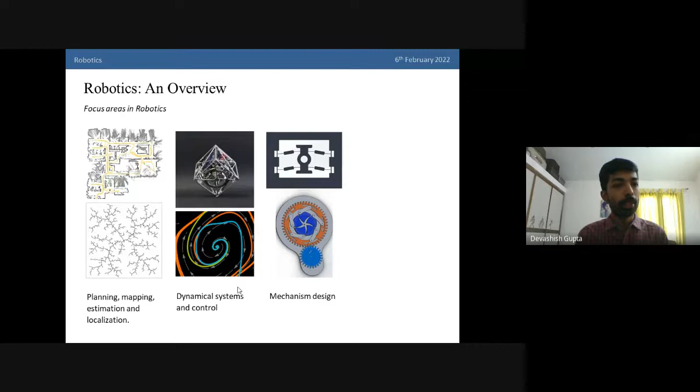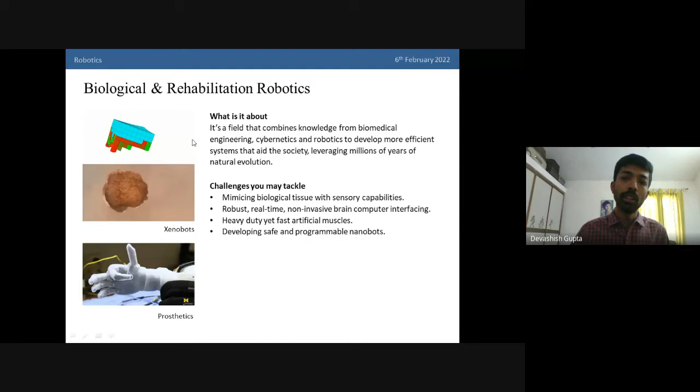There are some challenges within this field that one must tackle. If you wish to get into biological and rehabilitation robotics, you may try to mimic biological tissue that has sensory capabilities. Take our skin as an example. It is one of the most sensitive organs on our body. It can sense pressure, contact, temperature, and the roughness of a surface, characterizing surfaces based on particular texture. Mimicking this capability within a synthetic material with sensors is quite challenging.

Then we have a challenge within the area of brain-computer interfacing. Developing a robust, real-time, and non-invasive brain-computer interfacing system has been a challenge for quite some time. Non-invasive means one need not install a chip inside one's brain for the brain-computer interface to be active.

So thirdly, we have development of artificial muscles. Within this area, there has been a bit of success with materials like shape memory alloys, which have quite a bit of load carrying capacity. But their speed of operation is quite slow, because it depends on the ambient temperature and the corresponding change in crystal structure. So developing fast artificial muscles that also have huge load carrying capacity has been a challenge for quite some time.

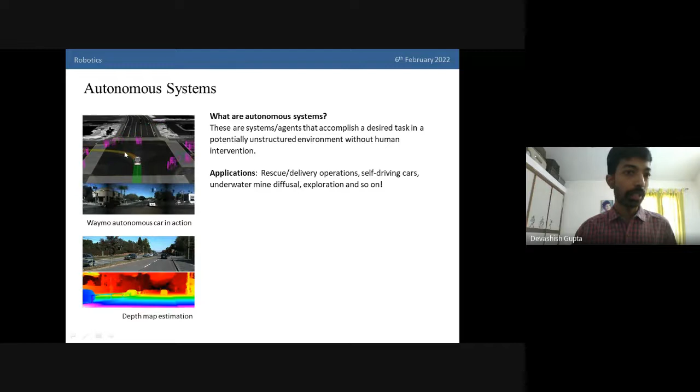Where would you actually use these systems? That's a question to ask. We can use these for rescue or delivery operations, and self-driving cars, of course. On the left, you can see the autonomous car built by Waymo, a company in the US. You can see it in action here—it's detecting all the cars around it based on the camera feed, and it's path planning as well.

Then we have underwater mine diffusal and exploration. You can use autonomous systems for that purpose as well.

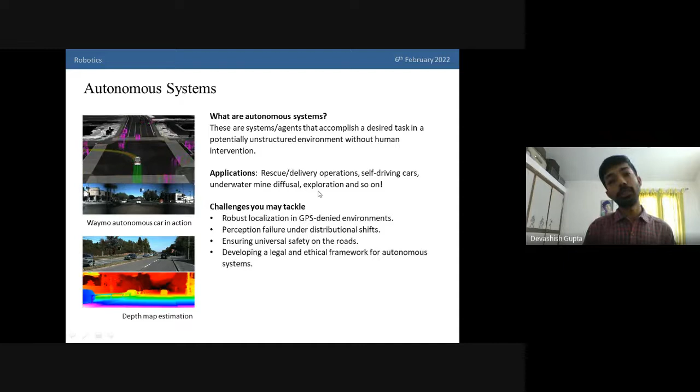Now, there are a few significant challenges within this field that you may tackle. First is robust localization under GPS-denied environments. Let's say you were traveling through a tunnel inside an autonomous car, which is relying on GPS for localization and no other system. Naturally, inside a tunnel there won't be any GPS signals, so you would lose your ability to localize and ultimately control your vehicle, and this would lead to accidents. So this is a problem that we have to tackle.

Secondly, we have perception failure under distributional shifts. This means let's say we have a vision stack developed in the US, and the training data was obtained on the roads of California. If we deploy that same vision stack on the roads of India, do you think it would work? Naturally it won't, because the data used for training is different from what the stack would observe on Indian roads—there would be different kinds of trees, different kinds of animals on the road, and pedestrian behavior would differ as well. So that's a challenge.

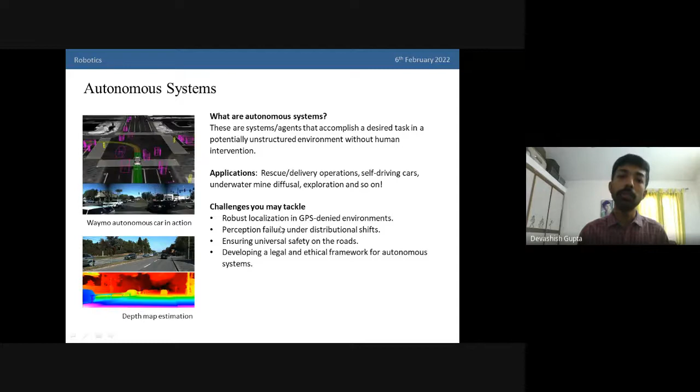Then there's ensuring universal safety on roads. Basically, your autonomous system should not discriminate between any particular obstacle. Let's say we have cars and trucks—your vision stack is perfect at detecting those, but it misses cyclists from time to time. This would lead to hazard for life on the road. So that's a challenge. And finally, we also have to develop a legal and ethical framework for autonomous systems in the decades to come, because if you get into an accident while sitting inside an autonomous car, who is to blame? That's the problem here.

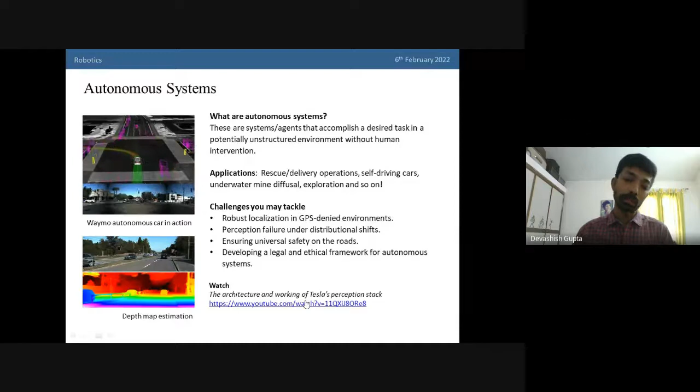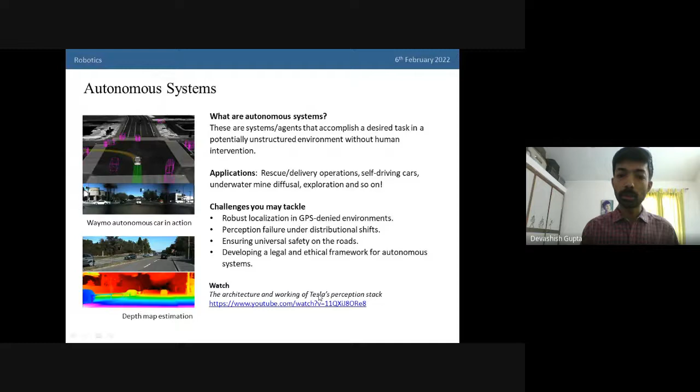I'd recommend you watch this video, a talk delivered on Tesla AI Day, which explains the architecture and working of Tesla's perception stack currently being used within Tesla models. That's an interesting talk—I recommend you check it out.

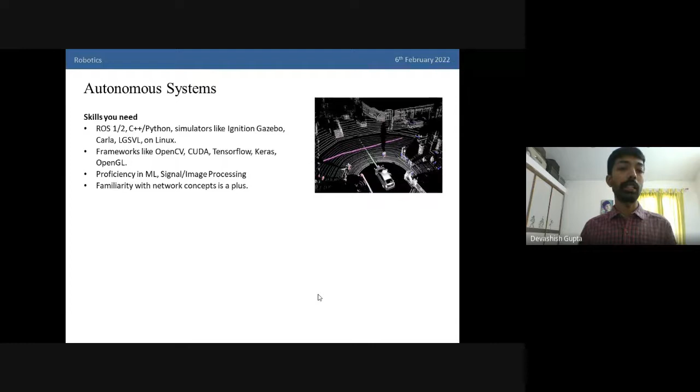The skills you need to work on autonomous systems: ROS 1 or 2 experience, C++ or Python, and experience with simulators like Ignition Gazebo, Carla, LGSVL, and of course Linux. Then frameworks like OpenCV for vision, CUDA for hardware acceleration, TensorFlow, Keras, OpenGL helps a bit as well, and proficiency in machine learning, signal or image processing. Familiarity with networking concepts is also a plus.

Then we have avenues for jobs—these are quite well-known companies: Waymo, Tesla, Nvidia, Google, Uber, and in India, Ola, as well as Apple and Huawei.

For higher studies or research, you could go to Stanford ASL, the Autonomous Systems Lab there, Ford Center for Autonomous Vehicles at University of Michigan, ETH Zurich, UCSD, U Toronto, or UC Berkeley. In the UK, you could go to Cranfield University, where you could do an MSc in Autonomous Vehicle Dynamics and Control, or NavLab at CMU as well.

So coming to multi-agent coordination and control.

This involves robotics swarms and handling of those. So why should we care about swarm robotics in the first place? It's because they have an ability to solve very complex tasks with collective behavior generated by very simple rules and interactions, and they are capable of adapting to their environment. Just imagine colonies of ants, the hierarchy within those, and how communication takes place between two different ants through pheromones. It's quite fascinating.

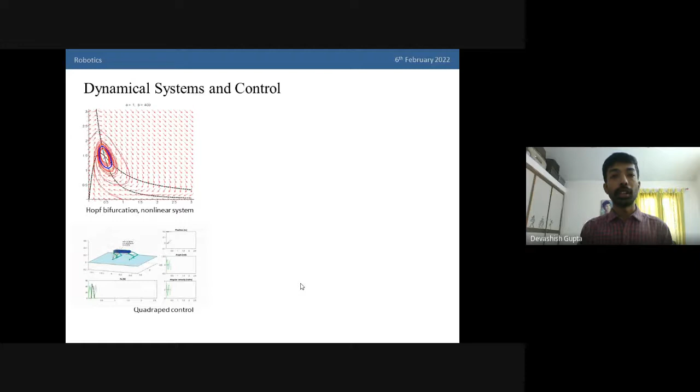And now we come to dynamical systems and control. So what's the purpose of control? Why do we need a control system for our robot? For any robot to execute our commands, the user commands, and execute a desired motion or something, it should be able to do it perfectly. So we need a control system that regulates the system behavior and minimizes error with respect to the user commands.

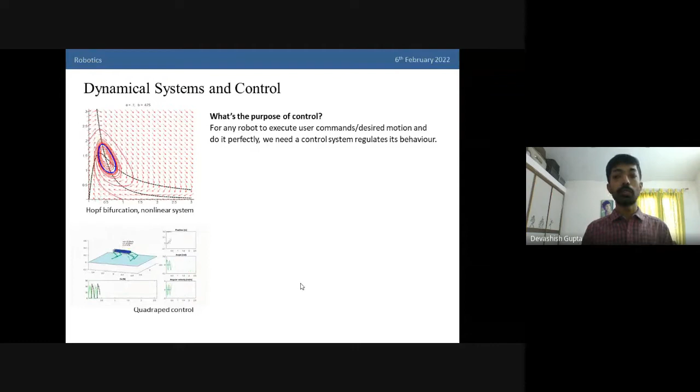And there are a lot of applications for control systems. It's present in almost all of the industries. We have process control, which is useful in chemical manufacturing plants. There's locomotion in bipeds and quadrupeds, attitude control in space, how the reaction wheels should operate in order to maintain the orientation of the satellite or the spacecraft.

Challenges within this field include: we have a lot of traditional controllers like PID that can be used for a lot of systems, but there are certain systems with non-linearities with which PID cannot be used. It simply cannot model the behavior of a nonlinear system with a theory that was built for linear time invariant systems.

Now, efficient real-time implementation of advanced control techniques is also a challenge. These techniques can include receding horizon control, which I'll explain. An example for a receding horizon controller is nonlinear model predictive control. So there are three words here: model, predictive, control. We have a model of the robot or any system, and using that model, we can make certain predictions based on the control input that we can give to the model.

So in MPC, what we do is based on the model, we have the ability to predict what the system would do, and we optimize over the space of all the possible control inputs to the system in order to find the optimal control input, which minimizes the deviation between the desired path that the model should take and the predicted path. So you have to do this optimization at every time step.

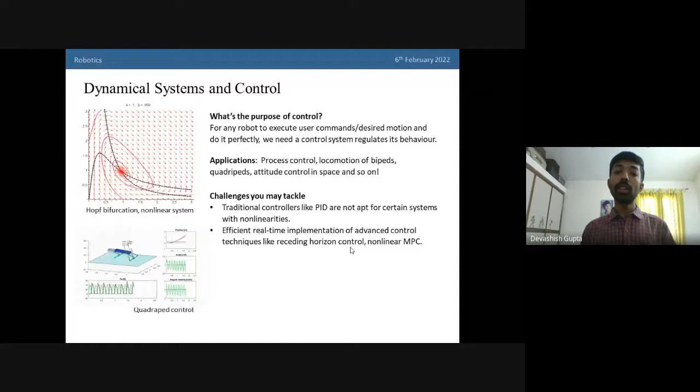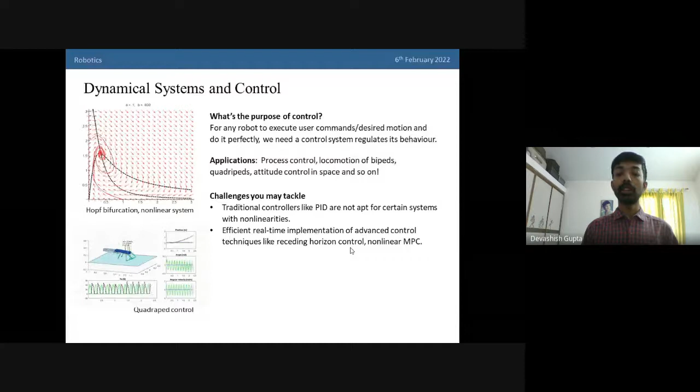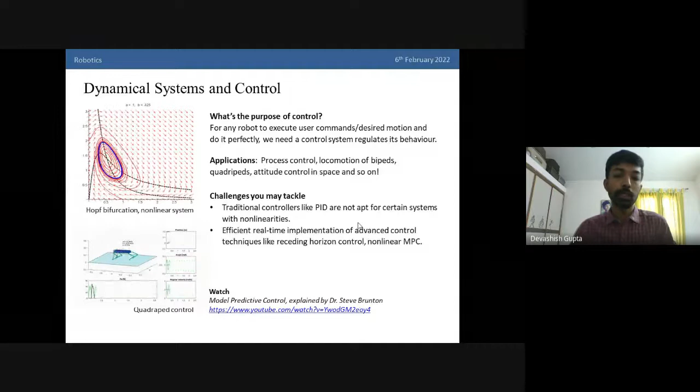And for stacks which are working at 30 hertz or something, this nonlinear optimization has to happen 30 times a second. That's quite a challenge for real-time implementation. So if you wish to take a deeper look into model predictive control, I recommend you watch this video by Steve Brunton, he explains it quite well.

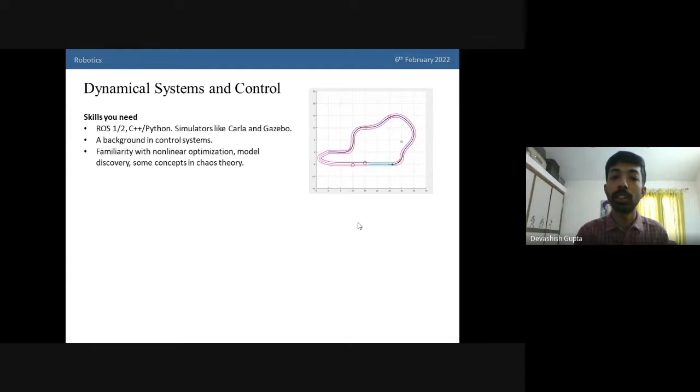Okay, so skills you need for getting into this area: ROS experience, C++, Python, and simulators like Carla and Gazebo. You also need to have a background in control systems, obviously, and also familiarity with nonlinear optimization, model discovery, and some concepts in chaos theory help as well.

So for jobs, you may go to these companies: Fanuc, Honeywell, General Dynamics, Emerson, Rockwell Automation, which is for industrial automation. Then for higher studies, you could go to Boston University, WPI, Binghamton University, Santa Clara as well, and there's an Applied Dynamics and Optimization lab at New York University, NYU.

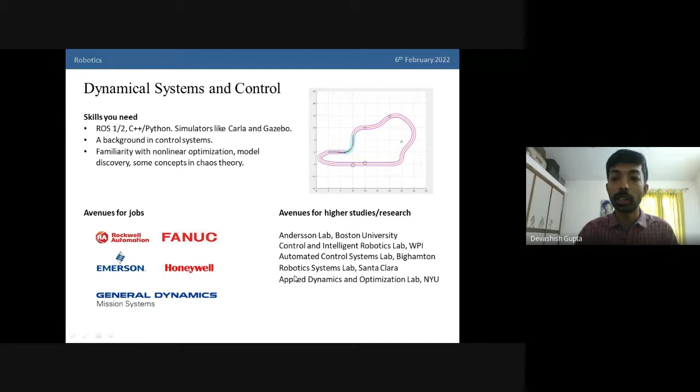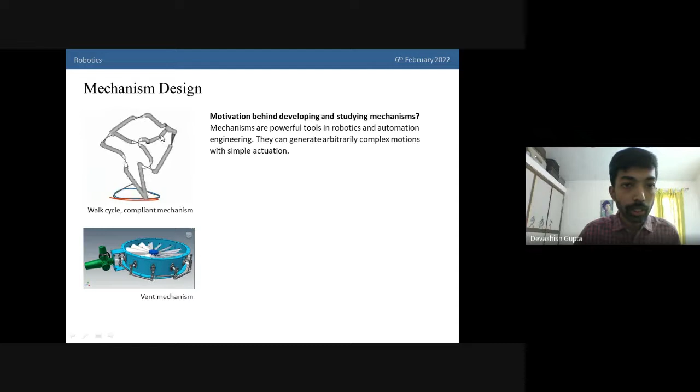So finally, we have mechanism design. Why should we care about developing and studying mechanisms? This is because mechanisms are very powerful tools in robotics and even automation engineering, and they can generate arbitrarily complex motions with very simple actuation. As you can see on the left, there's a simple rotational actuation here, and with that actuation, the compliant mechanism is generating a complex motion like this walk cycle.

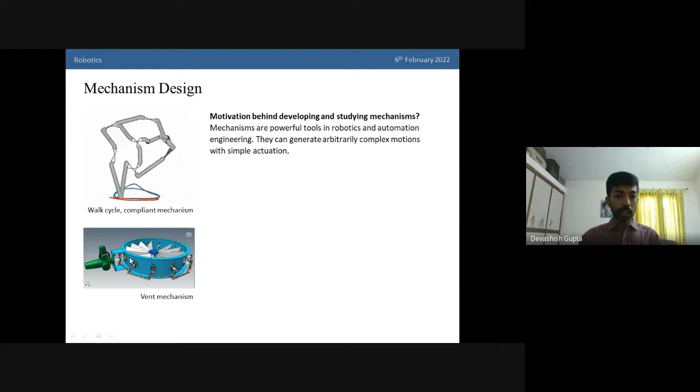And here also there's a vent mechanism. There's a simple rotational actuation here, and that operates all of the fins here. So that's why mechanisms are very useful.

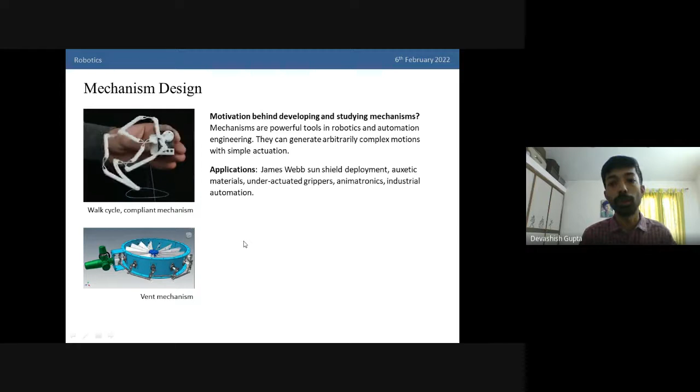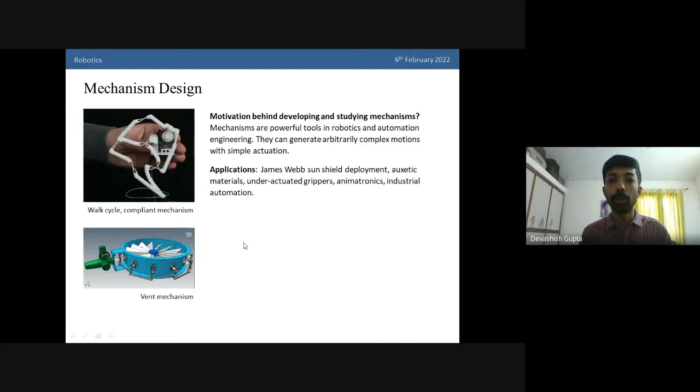Applications include the James Webb Space Telescope. I think it has already been deployed and is going towards the Lagrange point it has been designated to. The sun shield that was developed for the James Webb Space Telescope uses a mechanism to deploy.

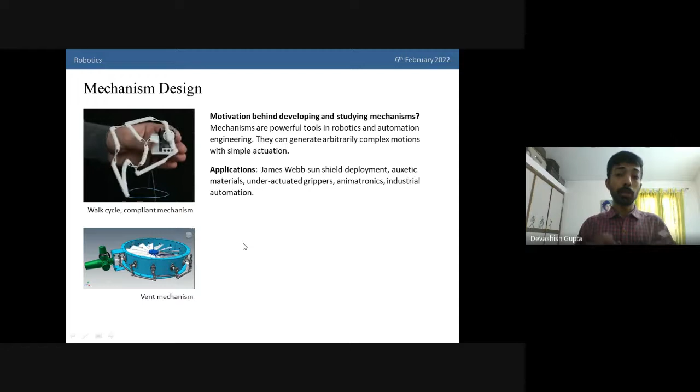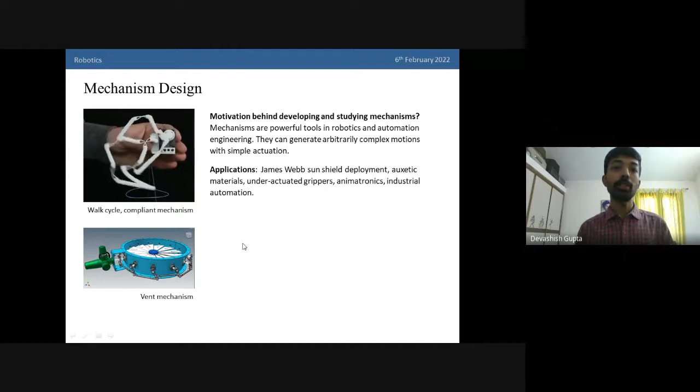Then there's auxetic materials as well, which are mechanical metamaterials that have negative Poisson's ratio. These are fascinating materials. And then you have underactuated grippers, animatronics, which is used in the special effects industry, and industrial automation as well.

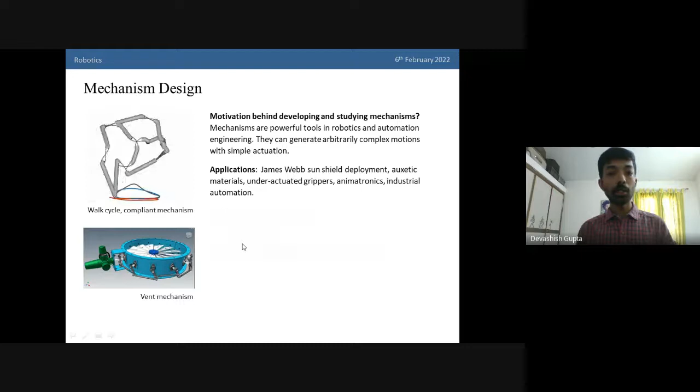So here are a few problems that you can work on if you wish to get into mechanism design. You can develop micro mechanisms for mechanical metamaterials, like I mentioned, auxetic materials.

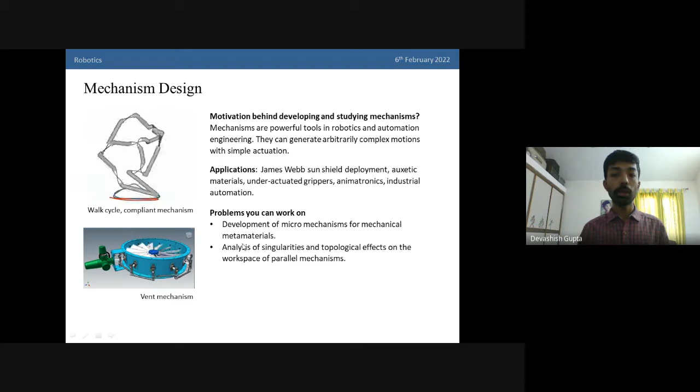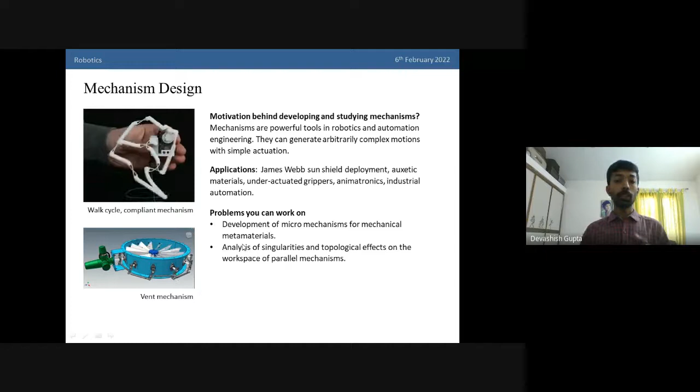The field of parallel robots and parallel mechanisms is not as much explored as serial robots. The analysis of singularities and their topological effects on the workspace of the parallel mechanism or robot has not been studied very extensively, so you can work on that area.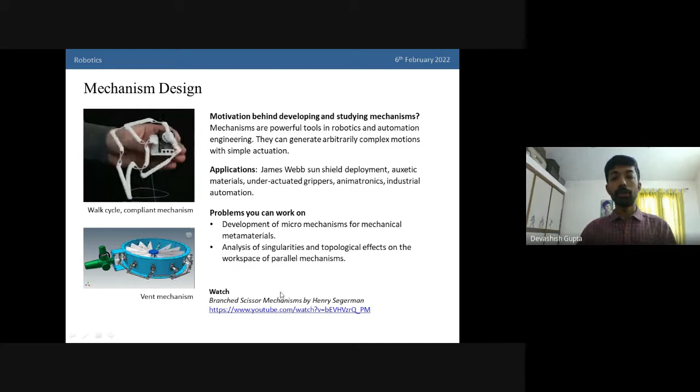And I would recommend you watch this video on branched scissor mechanisms by Henry Segerman. It's quite an interesting mechanism.

So the skills you need for mechanism design: this field involves multi-body dynamic simulations, so you need familiarity with that. Softwares like MSC Adams or COMSOL Multiphysics would play a role here. Similarly, you need familiarity with finite element methods as well, and formats like URDF and COLLADA, which can be used to model any kind of serial robot or linkage and so on, any mechanism. And intuition in origami would be a plus.

Then for jobs, you could work at Boston Dynamics, Wolfram Research, Raytheon Technologies, Penta Robotics. And for higher studies, you could go to the Geometric Computing Lab at EPFL.

This is, I think, one of the most fascinating and fun labs in this area, and it has a YouTube channel as well. I would recommend you check it out, it's quite interesting. Then you could go to CMU, ASU which is Arizona State University, Brown University, McGill, and you could go to USC as well, University of Southern California.

We have now looked at robotics, so let's take a look into artificial intelligence. What fields exist within artificial intelligence, what areas are there?

We have machine learning first, which is quite a vast field, and we'll discuss it in detail. Then we have natural language processing, which involves dealing with natural language, of course human interpretable language. Then we have evolutionary computation, where algorithms and optimization techniques based on biology are used, like genetic algorithms. And then we have computer vision, which we have already discussed, and finally we have knowledge discovery and data mining.

So finally, let's look into the field of space technology and what all fields exist within it. We have propulsion systems, then flight computing, avionics, navigation, and control, which is basically all of the electronics responsible for the entirety of spacecraft operation. Then we have human health, life support, and habitation systems, which are quite important if astronauts are involved within the mission. Then we have sensors and instruments which enable us to carry out scientific experiments out there in space.

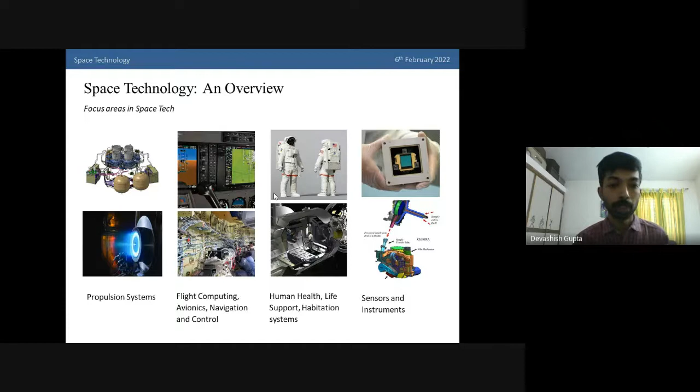So coming to propulsion systems, what is this area about? As the name suggests, this area covers the technologies for both chemical and non-chemical propulsion systems and the related ancillary systems, for space launch and even in-space propulsion applications.

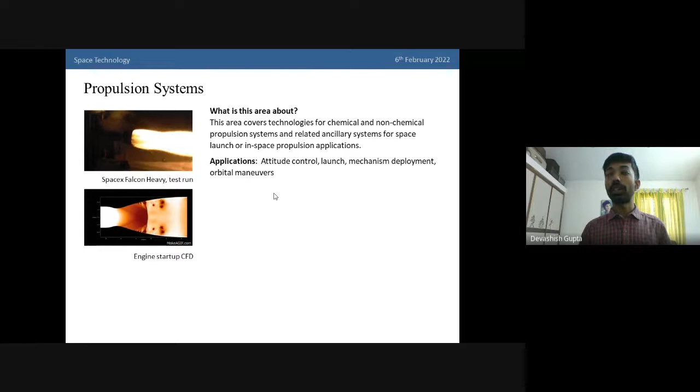So what are in-space propulsion applications? Like attitude control, we have reaction thrusters which try to maintain the orientation of the satellite or spacecraft in space, so you need a propulsion system for that. Then we have launch, of course propulsion systems are needed. Mechanism deployment, like for the James Webb Space Telescope, and also for performing orbital maneuvers, we need thrusters.

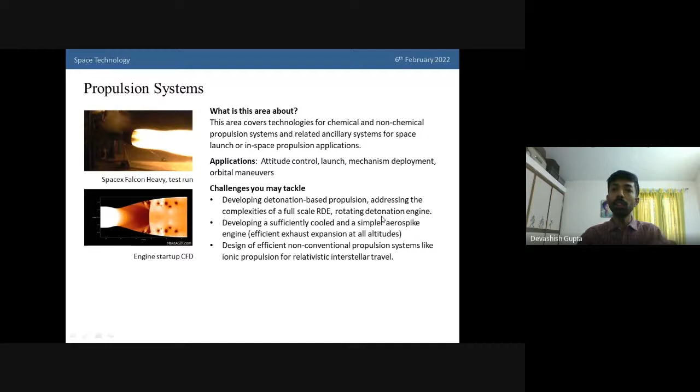Then there are a lot of challenges within this field. Firstly, a lot of propulsion systems that exist right now operate on the deflagration based mechanism. Deflagration is basically a rapid combustion process, but developing detonation based propulsion, which involves shock waves and harnessing the energy from shock waves, has been quite challenging. There's an engine called the RDE, rotating detonation engine, which has an annular combustion chamber in which shock waves are perpetually sustained using periodic fuel injection and so on. That engine has not been deployed at full scale yet.

What's the benefit of detonation based propulsion? Its efficiency is considerably higher with respect to deflagration based propulsion. So that's the challenge here.

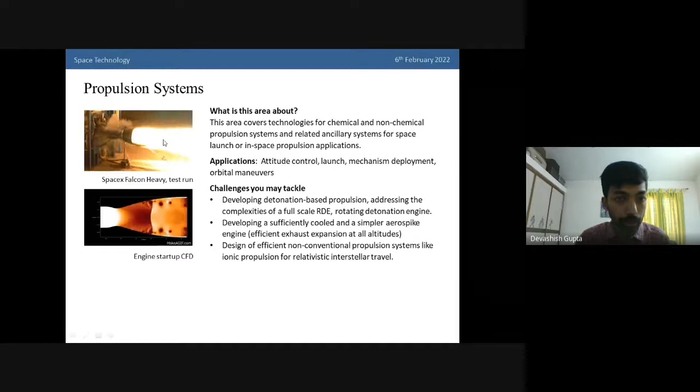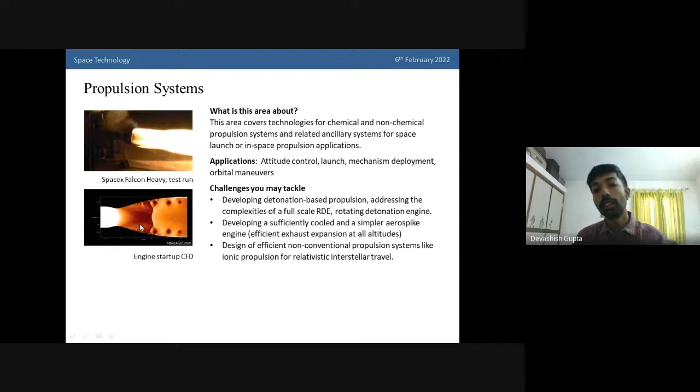Then developing a sufficiently cooled and simpler to manufacture aerospike engine. Basically, an aerospike engine has efficient exhaust expansion at all altitudes. The GIFs linked here use a standard converging diverging nozzle, and that's how they expand and accelerate the gas coming out of the nozzle. So the nozzle geometry is fixed, and there has to be an optimal expansion ratio for the gas at a corresponding temperature.

As we know, with altitude the pressure changes. So this fixed nozzle is quite inefficient at almost all altitudes, and it's very efficient only at a particular altitude. Whereas aerospike engines do not have this nozzle structure and have efficient exhaust expansion at all altitudes. So developing aerospike engines is also a challenge.

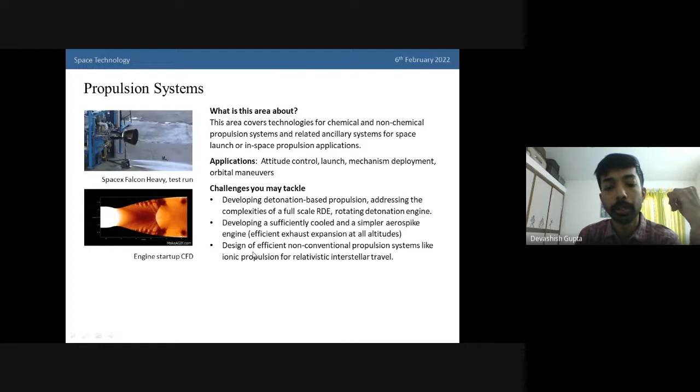Then design of efficient non-conventional propulsion systems like ionic propulsion, for relativistic interstellar travel - that is a challenge. Within the watch section, you could take a deeper look into rotating detonation engines and how the shockwave timescales and everything works. You could get an idea within this video.

It's by Steve Brunton, and the second video is on how GPUs were specifically used for a complete full-scale simulation of SpaceX's Mars rocket engine. That is quite a computationally challenging task, and how they leverage techniques like wavelet compression and sparse grids and so on. That is quite a detailed and insightful talk.

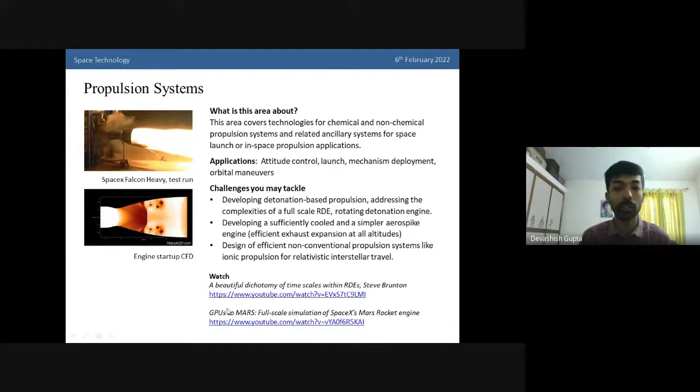The skills you need for developing propulsion systems: obviously familiarity with fluid mechanics, gas dynamics, computational fluid dynamics concepts, vibration theory, because there's a lot of vibration and your systems need to work under that. Then there's chemistry of combustion. You need familiarity with simulation softwares like ANSYS Fluent, COMSOL Multiphysics, and CATIA. C++, Python, and MATLAB proficiency is expected as well.

For jobs, you could go to almost all of these companies - Indian companies except SpaceX. There's Agnikul Cosmos, the ISRO Propulsion Complex, Bellatrix Aerospace, Dhruva Space, and then SpaceX.

For higher studies or research, you could go to ISRO's Propulsion Complex, Computational Aerosciences Lab at the University of Michigan. IISc has a propulsion group as well. There is the Thermal Propulsion Systems group at Oxford, and you can join IIST as well for masters in aerospace engineering. You could also go to UIUC, Jet Propulsion Lab at NASA, then the Propulsion Lab at European Space Agency.

Now, coming to flight computing, avionics, navigation, and control. What is this area about? This area covers all of the unique electronics, all of the computing hardware involved in flight systems, and these can be used in space or within atmosphere as well. These systems are responsible for tasks like navigation, thermal management, telemetry of data, flight data logging, and so on.

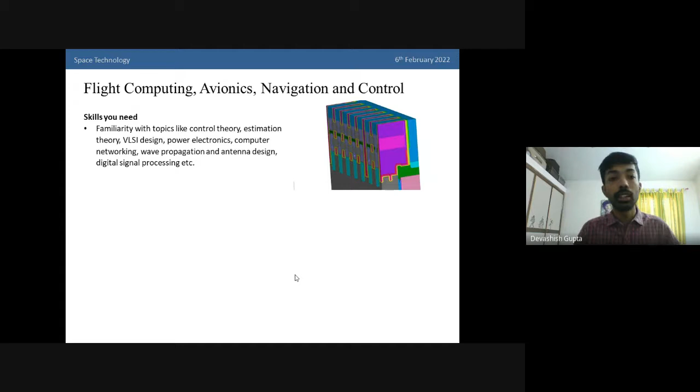For the skills you need to get into this field, topics include control theory, estimation theory, very large scale integration (VLSI) design, power electronics, computer networking, wave propagation and antenna design, and digital signal processing. This is quite a lot of requirements, right?

For jobs, you could go to Bharat Electronics, GE Aviation, HAL, Antrix Corporation, and you could join Boeing as well.

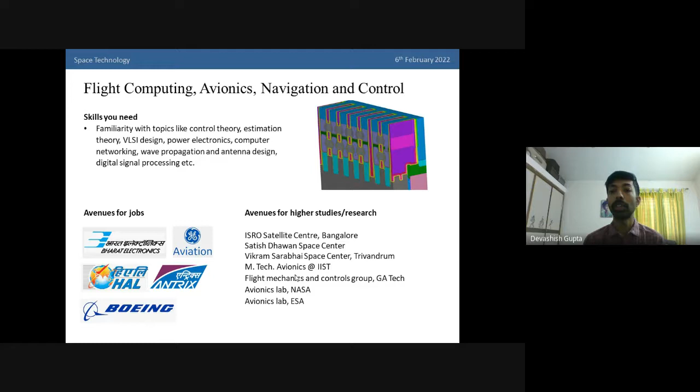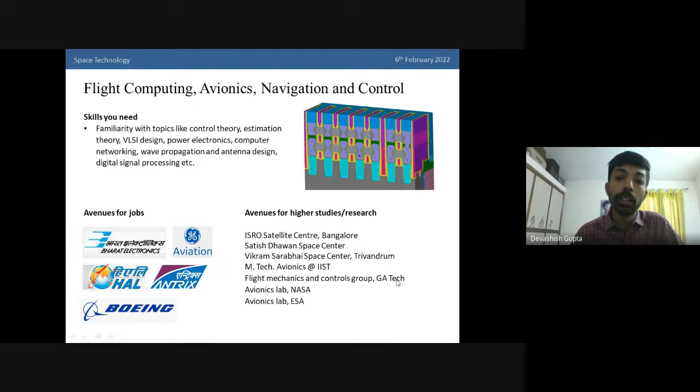For higher studies or research, you could go to ISRO Satellite Center Bangalore, Satish Dhawan Space Center, VSSC (Vikram Sarabhai Space Center) at Trivandrum. You could do an MTech in avionics at IIST, and flight mechanics and control groups. There's this group in Georgia Tech as well, and avionics labs at both NASA and the European Space Agency. So this is about flight computing, avionics, navigation, and control.

Then we have human life support, human health, life support, and habitation systems. The key goals of this area are to develop technologies specific to the human element. These technologies directly affect the crew's needs, survival, and well-being, and also include the environment and all the interfaces the crew encounter.

All of these systems have to be optimized for space use, and a certain number of crucial tasks it has to satisfy, like CO2 scrubbing. If you don't remove the CO2 from the atmosphere, its concentration would gradually rise and lead to CO2 poisoning eventually. Then there are HVAC systems - heating, ventilation, air conditioning - which is necessary in space as well.

There's wastewater recycling - you cannot afford to lose a single drop of water within space. Then there's poisonous gas trace detection and healthcare within space.

Coming to the challenges, the current state of the art spacesuits have quite limited mobility, and the challenge is to develop spacesuits that provide ideal dexterity to astronauts during spacewalks, doing extravehicular maintenance and so on, while minimizing the fatigue astronauts feel.

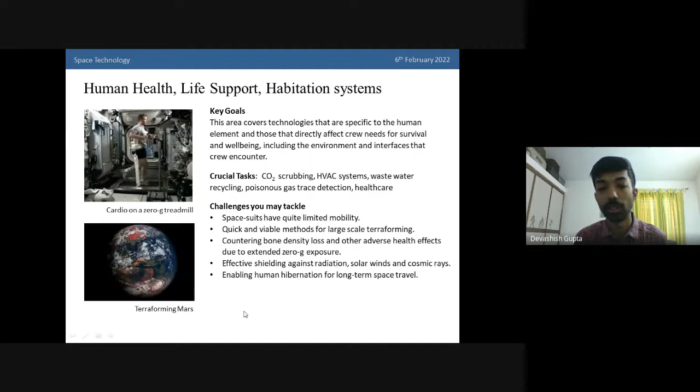Then you could check out NASA's environmental control and life support system in this video, to see how it works and so on.

The skills you need for developing such systems basically include familiarity with HVAC systems, concepts related to respiration or metabolism, even novel methods for agriculture, fluid mechanics, and human physiology. This is quite an interdisciplinary area as it requires a lot of knowledge from different fields.

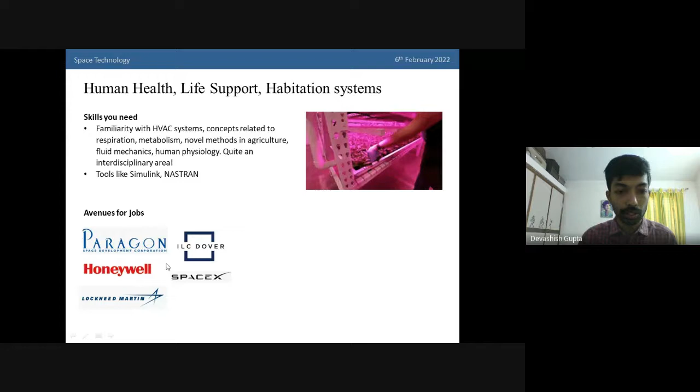You also need to know tools like Simulink and Nastran, which are used by NASA and ISRO. For jobs, you could go to Paragon Space Development Corporation, ILC Dover, which develops space suits for astronauts. There's Honeywell, SpaceX, Lockheed Martin.

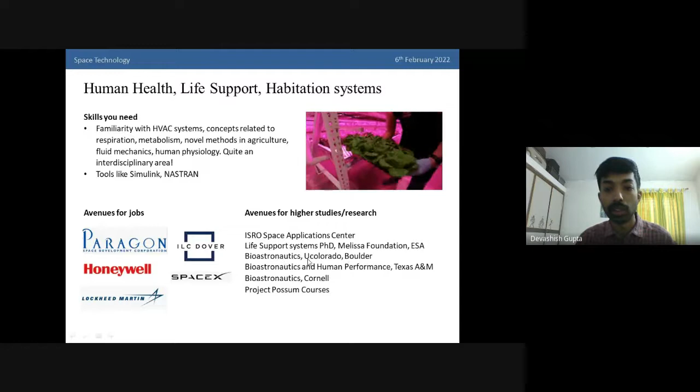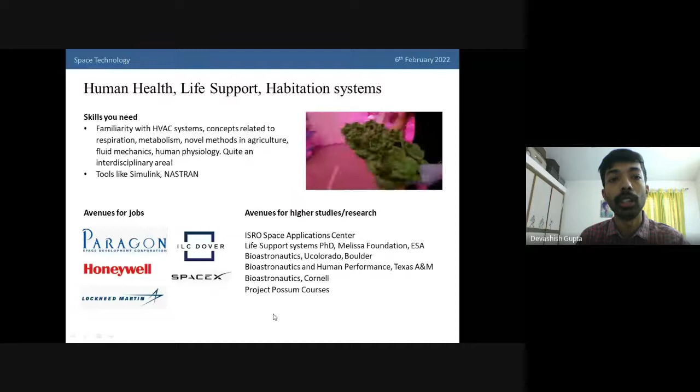For higher studies, you could go to the ISRO Space Applications Center. You could do a PhD in life support systems at the Melissa Foundation, set up by the European Space Agency. Then you could go into bioastronautics at the University of Colorado, Texas A&M, Cornell as well, and also take courses like the Project Possum courses, specifically made for designers of life support systems, habitation systems, and so on.

Finally, let us come to sensors and instruments. This area covers technologies for instruments and sensors which enable the mission to carry out remote observation, scientific measurements in space, imaging, and remote testing as well.

There are a lot of challenges within this field. Basically, we have to improve the spatial and temporal resolution of all of the remotely sensed data. Take an example of the Google Map update frequency. It's certainly not the case that we get updated data on a daily basis on Google Maps. So that's quite a bottleneck.

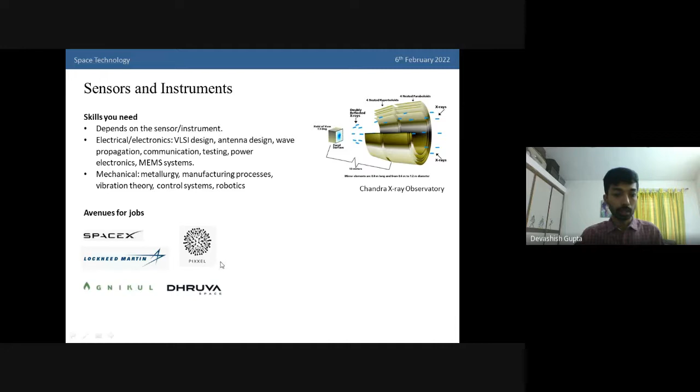Then these are the companies where you could work for developing sensors and instruments. There's Pixxel, which is an Indian startup that develops microsatellites for hyperspectral imaging. That's a quite a great company. And there's SpaceX, Lockheed Martin, Agnikul, Cosmos, Dhruva Space. And for higher studies or research, you could go to ISRO Inertial Systems Unit, where that's the place where I worked, and we have Vikram Sarabhai Space Center, ISRO Space Application Center.

There's also an ISRO lab for electro-optics, you could go there as well. And there's Indian Institute for Remote Sensing. You could go to Johns Hopkins at the Applied Physics Lab - this lab actually supplied a few key components for the Perseverance rover. Then we have Space Sciences Lab at UC Berkeley.

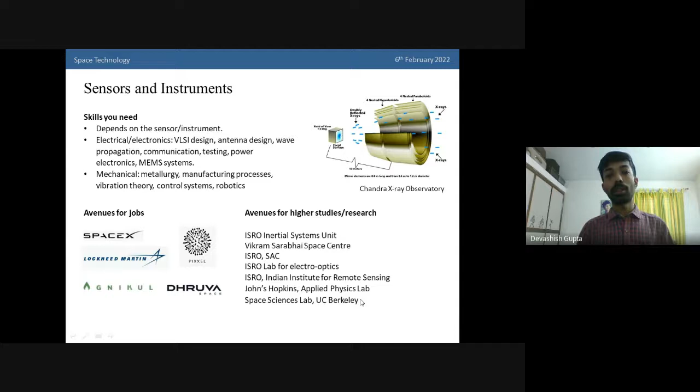So this is about the field of space technology. We looked into artificial intelligence, we looked into robotics, and hopefully I was able to give you a bird's eye view of all of these fields, and hopefully motivate you to pick up interesting projects in these fields, and potentially tackle some challenges that I've discussed.

I also agree with Devashish. You can switch to a different master's. If you want to go into aerospace, you need to show some relevant projects or internships, and you can also mention the key motivations to do a master's in aerospace in your SOP. Since foreign countries have a holistic approach to the application process, it is possible to switch your master's. Anyone else?